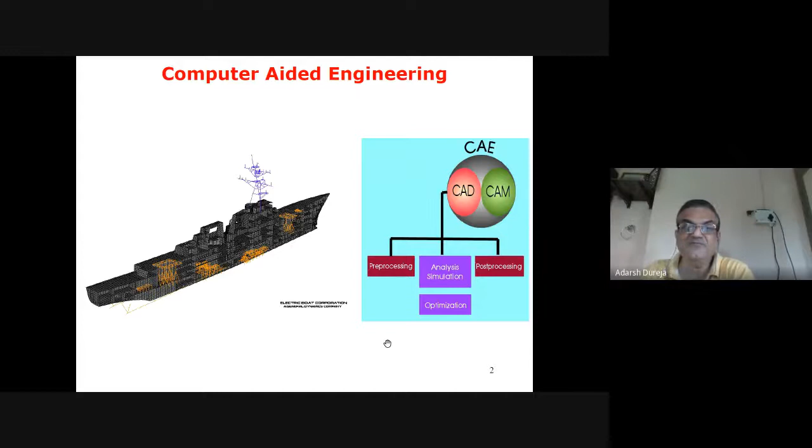So we talk about what is the scope of the analysis, what is the purpose, and at what scale we want to do it. Sometimes we may be interested in a small scale single part optimization, modeling the intricate details of each and every corner of the component, so that we know the detailed stress analysis of that particular component. Once we do this component analysis, our components are qualified.

Sometimes we will be looking for a full vehicle analysis, like a large scale simulation, vehicle crash worthiness analysis, in which we may not be interested in knowing what is happening at individual part level, but we may be interested in knowing what is happening to the whole body of the vehicle, aircraft, or ship.

Both of these analyses may employ the same software, but with significantly different models. What I mean is, in one, where we are optimizing the component itself, we might have modeled each and every intricate detail of the component. While doing a large scale simulation, we might have just replaced it by a rigid link, a bar element, or a beam element. So we are not actually interested in the component itself, but in the whole body of the vehicle, what is happening to that.

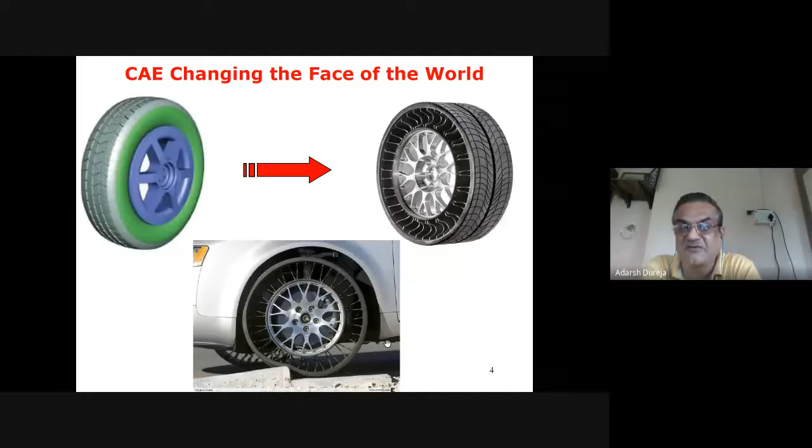So having known this analysis, now we'll move to the representation. How do you represent these structures in the finite element model? So this is my geometry. I'm saying this is the geometry. This I beam is a geometry.

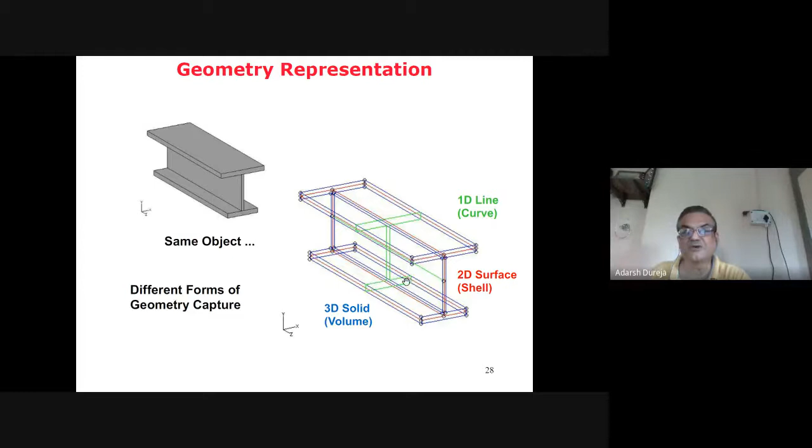And if you look at that, depending on what kind of analysis we are looking for, we can represent this geometry by various finite elements. So what I mean is, if you are looking for what kind of stresses are getting generated in the web, what kind of stresses are generating in the flange, if that is my interest, I should model it as a 3D solid, that is the volume. I should discretize this volume into different 3D elements and do the analysis.

If that is not the case, and the only thing I want to know is what is the warpage of this section and things like that, then I can model it as a 2D surface. So I can discretize this using shell elements.

Suppose that also I'm not interested in, and I just want to use this element as one of the structural elements connecting to different kinds of structures, as a load transfer element, then I can use it as a 1D line. So I can model it as a beam element or a bar element depending on the boundary condition. So the same geometry can be modeled as a 1D element, a 2D element, or a 3D element.

So what I've gathered from the coordinator is that 1D and 2D have already been covered in the previous lecture, so today I will concentrate more on 3D elements.

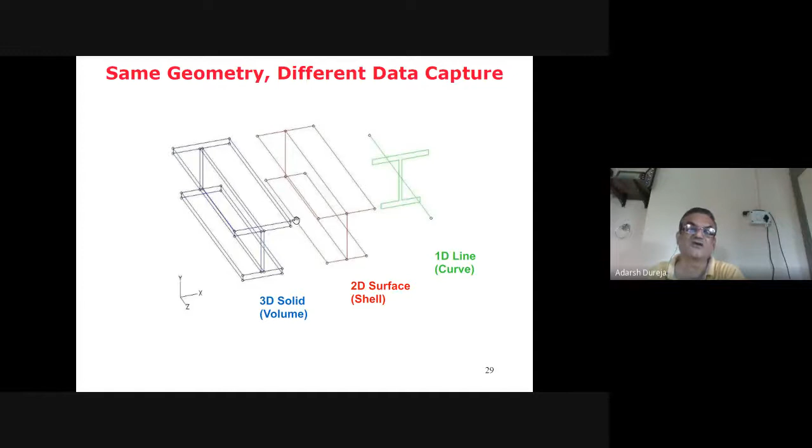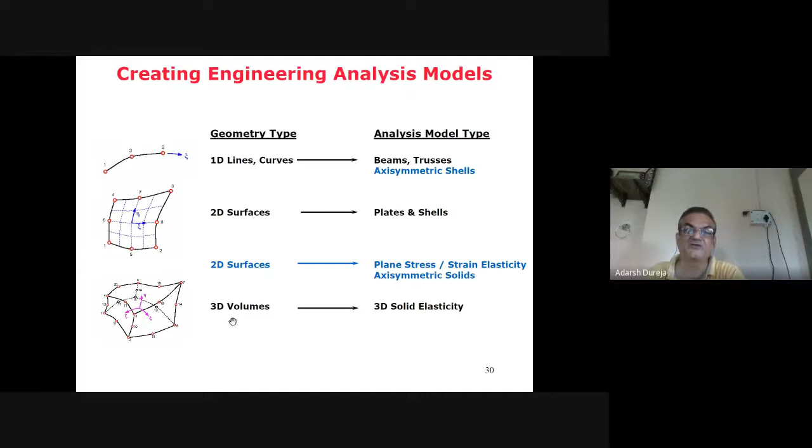So I've just listed what kind of geometry we can have and what kind of finite element models we have. If you are talking about a geometry as a 1D line or curve, we can have a beam element, a truss element known as a bar element, or an axisymmetric thin shell. If you talk about a 2D surface, discretizing geometry by 2D surfaces, we can have a plate element or a shell element. In theory, plate and shell basically refer to transverse loading. For a 2D surface like membrane loading, we can have plane stress, plane strain, or an axisymmetric solid, or a 3D volume with 3D solid elements. So we'll talk about 3D solid elements.

So there could be different components which we may be interested in understanding the behavior of. These are some examples of mechanical components whose behavior we'll want to understand under various operating loads. Basically there are two kinds of elements used for discretizing any solid model in finite element analysis.

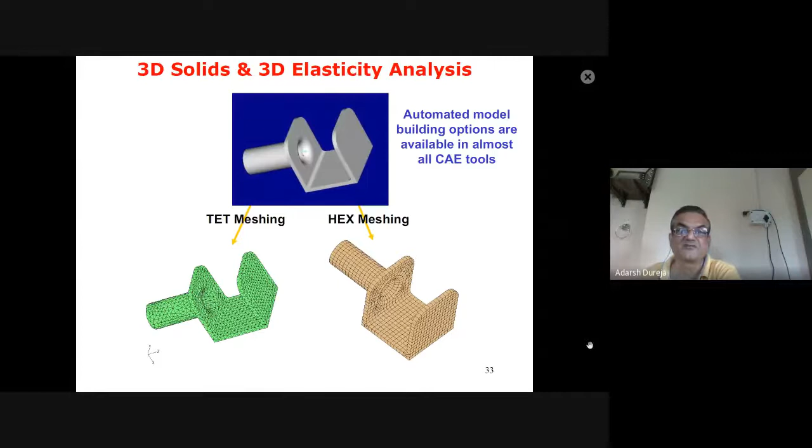To talk about some strain fundamentals, as we know in case of 3D we have 6 strain components: normal strains epsilon x, epsilon y, epsilon z, and gamma xy, gamma yz, gamma zx - these are the 3 shear strain components. This is the stress-strain relationship for 3D, so we have 6 stress components related to 6 strain components through this D matrix.

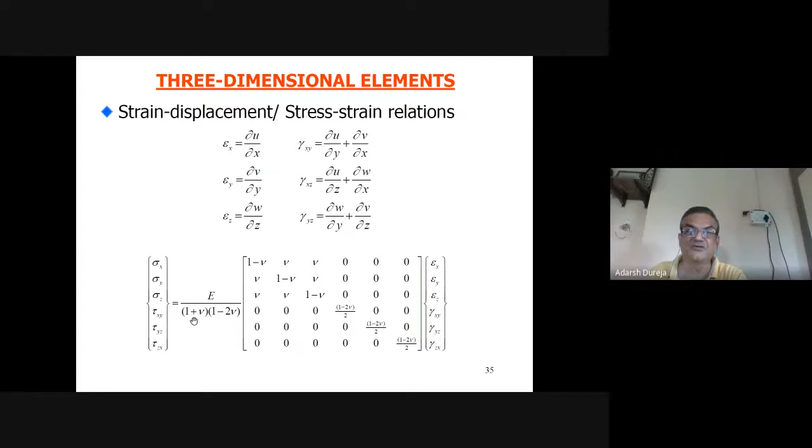So the unknown nodal degree of freedom vector is 12 cross 1. You have U, V, and W displacement at node number 1, similarly for node number 2, node number 3, node number 4. So we have a 12 cross 1 nodal displacement degree of freedom vector.

As we know, to define this polynomial in a finite element technique, we have to a priori choose what kind of polynomial will be suitable for representing the deformation behavior. So we write U, V, and W as functions of X, Y, and Z. This includes the constant parameter required for rigid body motion, and a linear function of X, linear function of Y, and linear function of Z.

Now we have 4 unknowns for U, 4 for V, and 4 for W, so total 12 unknowns. We know these values also at the nodal values, so we can find out what kind of relation develops with the shape function, so that we can represent these unknown values as compared to the unknown quantities like A1, A2, A3, A4. These quantities represent the shape functions like N1, N2, N3, N4. So we are getting shape functions for this.

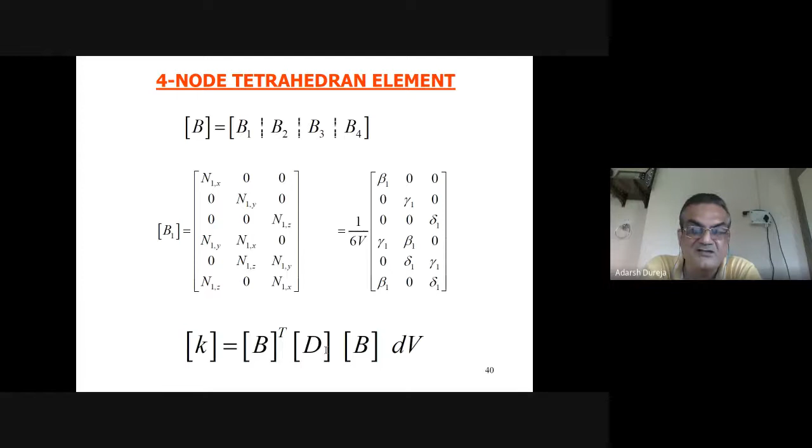Now we know that for writing down the stiffness matrix, we need to know the B matrix and D matrix. We have already defined for 3D elasticity the D matrix, which is the matrix that relates stresses to strains, given as a 6x6 matrix. Now we have to define the B matrix.

As we know, the B matrix comes from the definition of the strain vector. Epsilon x has been written as dou u by dou x, and u can be written as n1 u1 plus n2 u2 plus n3 u3 plus n4 u4. So if I take the first partial derivative of this shape function with respect to x, y, and z, then we'll get the B matrix.

So I partitioned this B matrix into B1, B2, B3, B4, corresponding to node number 1, 2, 3, and 4. If I write down the B1 matrix, that is the first order derivative of the shape function with respect to x, written as dou n1 by dou x, dou n1 by dou y, dou n1 by dou z. This gets populated as the matrix which relates the strain vector to the nodal displacement vector.

So basically, if you multiply with the nodal displacement vector, that is u, v, and w, what we get is dou n1 u1 by dou x. So if you sum it up, you get the strain vector, like epsilon x.

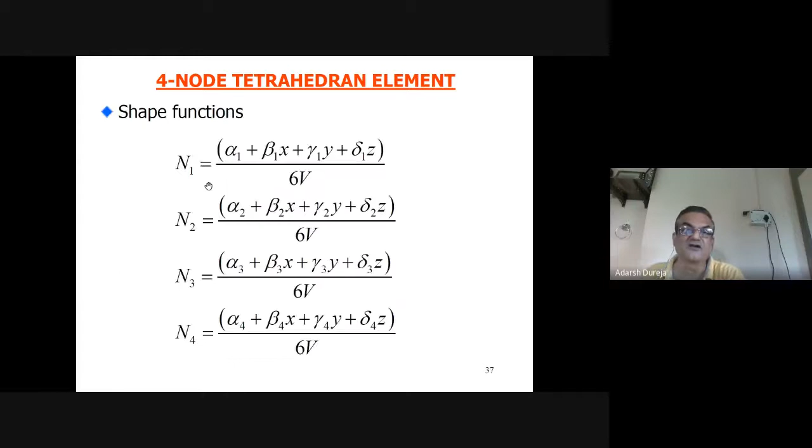So if you now take partial derivatives of n1, recall n1 is alpha 1 plus beta 1 x. If I take the partial derivative of n1 with respect to x, I get beta 1. Similarly, you get gamma 1, delta 1, and for the shear strain components you get combinations like gamma 1, beta 1, and so on. This line represents epsilon x, this represents epsilon y, this represents epsilon z, and these lines represent gamma xy, gamma yz, and gamma zx.

So this is the B matrix, and similarly we can write the matrix for node number 2, 3, and 4. We'll get a constant matrix because these beta 1, gamma 1, delta 1 terms are nothing but functions of the nodal coordinates, and nodal coordinates are constant values. So we get a constant value for this matrix, and we know the D matrix is also constant. So if you multiply these, you get a constant stiffness matrix for a tetrahedron element.

So this was all about a linear tetrahedral element. We can discuss more about a 10-noded tetrahedral also, because right now what we studied is a linear tetrahedral with only corner nodes. If you look at the second order variation of this element, we have to introduce a mid-side node.

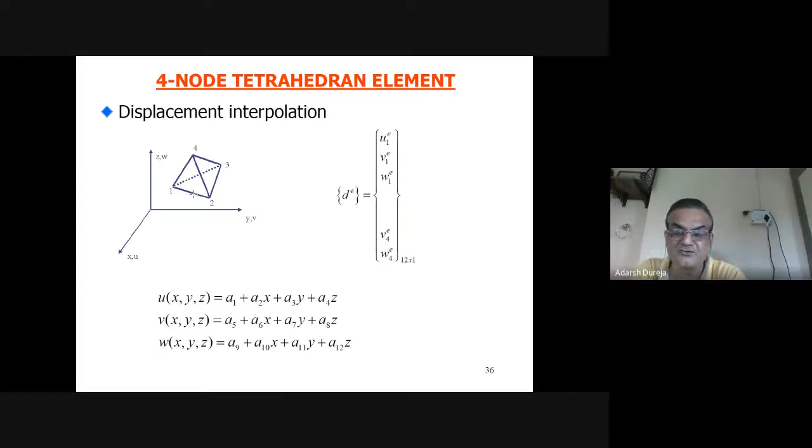We have actually 6 edges, so if we introduce 6 more node points at the mid of these edges, we'll have 6 nodes added to this element. So we'll have a 10-node configuration, which is known as the quadratic tetrahedron element. That is another version of this.

Let us look at another version as far as geometry is concerned. As said, we can have a tetrahedron element or a brick element. This is the most popular element, known as the 8-noded hexahedral element or brick element. So what we have is a cuboid kind of structure with 8 corner nodes like 1, 2, 3, 4, 5, 6, 7, 8. These are the corner nodes.

And we know that we can always write x equal to ni xi, that is n1 x1 plus n2 x2 plus n3 x3 and so on, with summation going from i equal to 1 to 8. And if you write down the shape functions, as we know, they can be written by the method of zeros, using the axes we call xi, eta, and zeta.

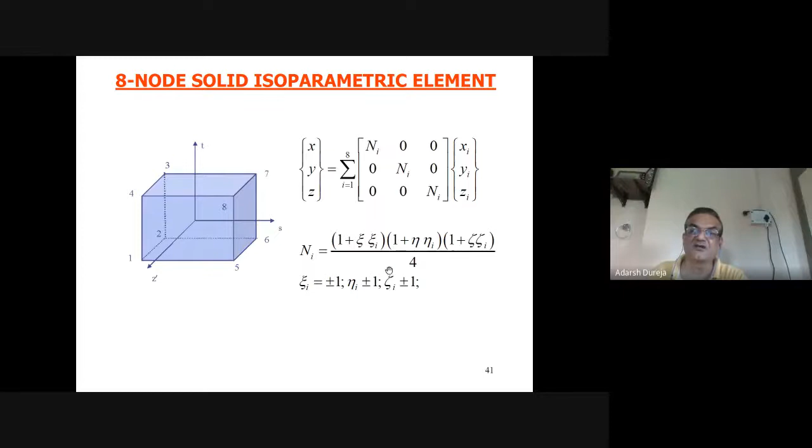So if you write down the equations of those planes where a particular node is not present, you can write the shape function as a general equation. If you substitute the nodal coordinates for a particular node, you get the shape function for that node. To elaborate, suppose you want the shape function for node number 1: write the equations of the top plane, right plane, and back plane, and then match a constant so that you get a value of 1 at its nodal location, node number 1. We adopt the same philosophy for all nodes to write out the shape functions.

Similarly, for a quadratic form of this 8-noded element, since there are now 12 edges, we need to introduce 12 more nodes to this element, giving us a 20-noded element. For writing down the shape functions,

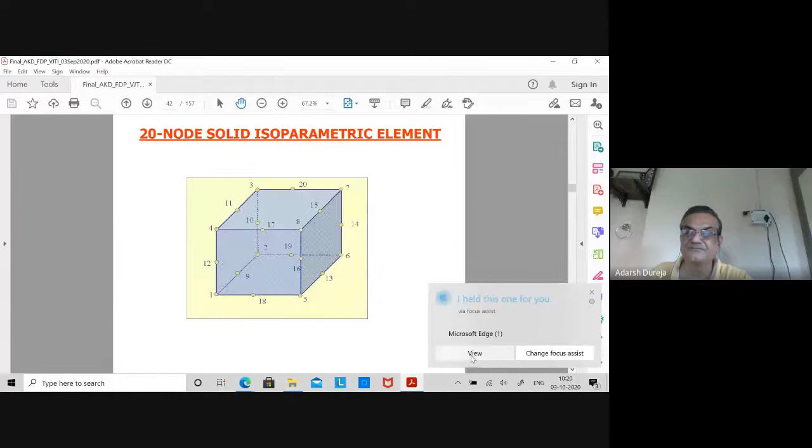the philosophy we follow is the serendipity form of element, where we first write down the shape functions for all mid-side nodes. This is the mid-side node, and we get a quadratic form of this element. So what we have done is introduce a mid-side node.

So for writing down the shape functions, we use serendipity formulation. We write the shape functions for a particular mid-side node first, and once that's done, for the corner node we write the shape function as for a linear element. If you derive a shape function for a linear element and plot it, you get a value of 1 at its nodal location and 0 at other nodal locations. If you plot that 0 to 1, you'll get a value of half at all mid-side nodes.

So what you do is write the shape function for node number 4 as a linear element, then reduce by half the shape functions for node number 11, node number 17, and node number 12. By doing this, you are imposing the condition that the value of the shape function is 1 at its own nodal location and 0 at all other nodes. This is the philosophy adopted for writing shape functions for a quadratic element.

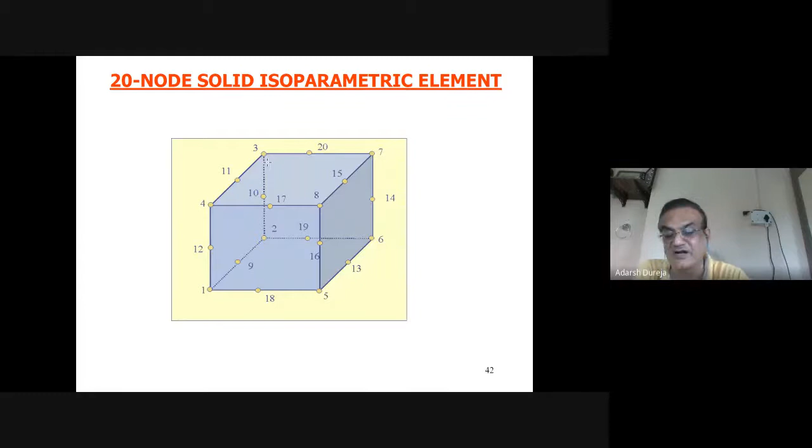Just to give an example, think of an eggshell - it's very fragile, right? But if you load it properly, it can take a large load. Even if these shells are very small, if the loading is truly axial in nature, it can take a very large load, because the load you apply tries to change the curvature of the membrane in the circumferential direction, and that strain is very small, so it can take a very large load.

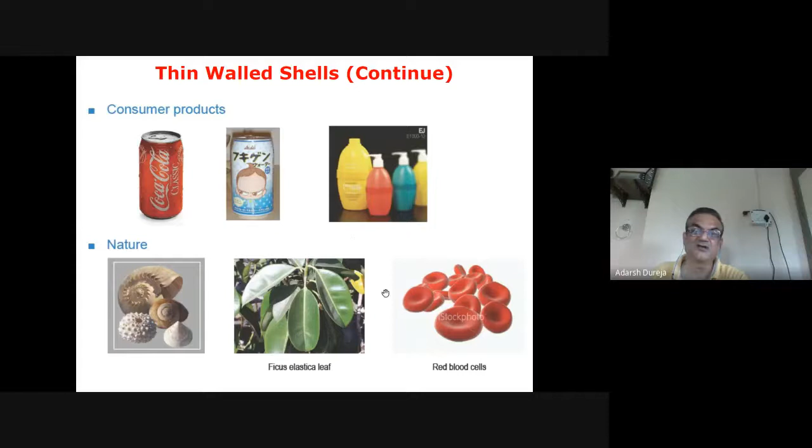So these are the various thin shell structures shown here, and these are some of the structures you see in nature as well. So basically, when we talk about plate and shell elements for analysis, our target structures are thin-walled structures. These are various thin-walled structures which I am showing here.

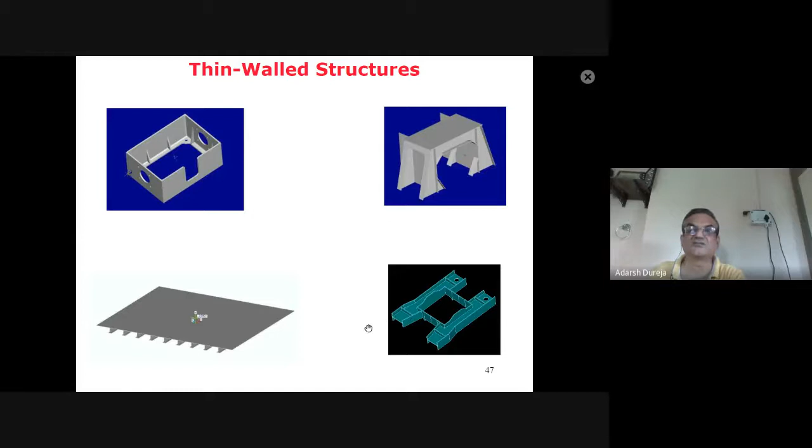So what we do is basically we make a solid model, and out of that solid model we extract the mid surface, because these are 2D elements which are subjected to transverse loading. In 2D elements like plane stress or plane strain, the loading is in-plane, that is, we get a membrane load. But in plate and shell, we apply the load in the transverse direction, as in thin-walled structures.

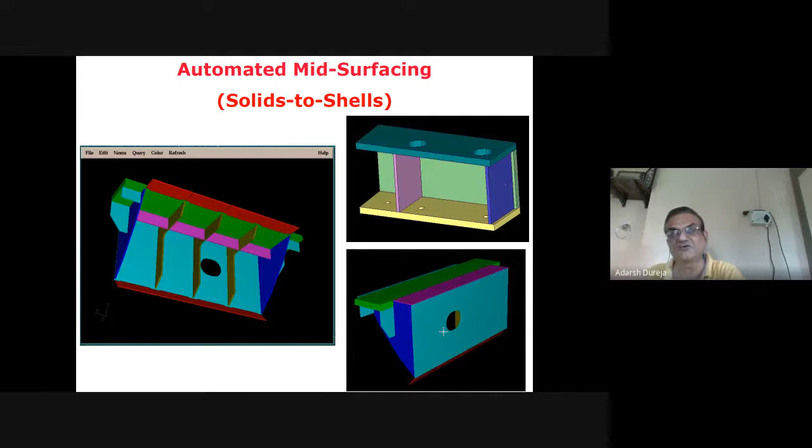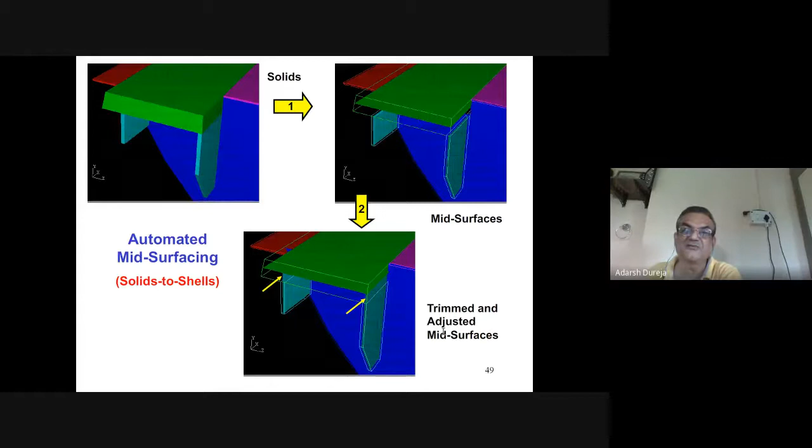So what we can do is model it and then extract the mid surface, and that mid surface can be discretized using finite element. These are various examples which I am showing here. This is the actual structure, maybe chassis of the vehicle, and you can extract the mid surface, which can be modeled using a 2D plate shell element.

These elements have thickness as a property of the element, not actually modeling the thickness of the plate. This is another example of a stiffened plate, where you have a plate and at the bottom beams to strengthen it. We have two options, shown as idealization 1 and idealization 2.

The stiffener has been modeled explicitly as a shell element. These are the top elements representing the plate, and this is the bottom representing the stiffener. If you are not particularly interested in understanding what is happening to the stiffener, you can instead model this stiffener as a beam element.

So there will be one more set of elements running throughout this length, and those will be beam elements. The beam elements will have properties like stiffness, moment of inertia, and so on. Both idealizations will work nicely.

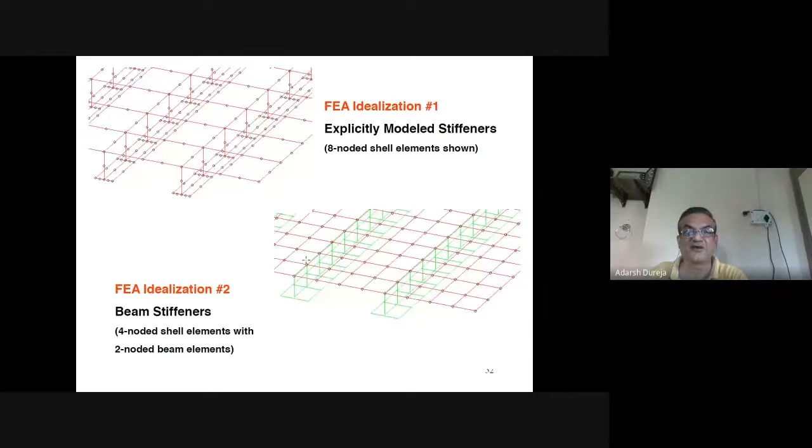Only thing, as an engineer, we have to decide whether we want to analyze this stiffener separately, or we just want to understand the effect of this stiffener on the whole deformation pattern of the plate. That is the decision we have to take, and accordingly we can model it.

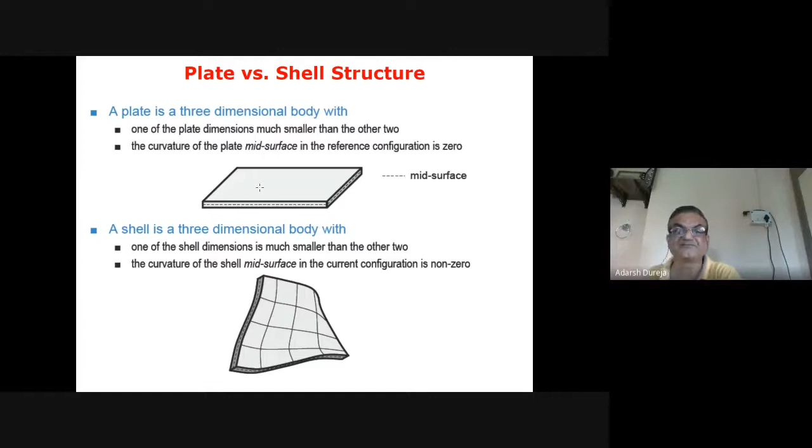Now, if you talk about plate and shell structures, the mid surface of a plate is flat, while the mid surface of a curved shell is not flat, and one dimension is very small compared to the other. So we are able to utilize the plate and shell finite element technique for analyzing this structure; otherwise, we would have to go for 3D analysis. Basically, thinness and flatness are the major properties of a plate structure.

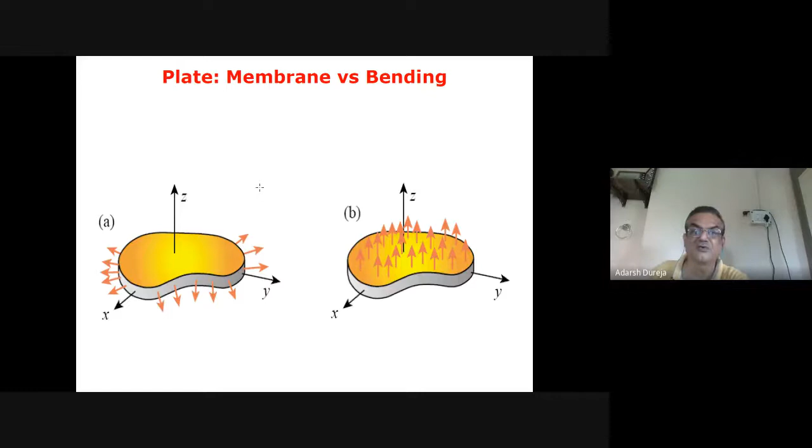Now we can have membrane loading as well as bending loading, so both kinds of loading can be there. This is the membrane and bending response of a plate element.

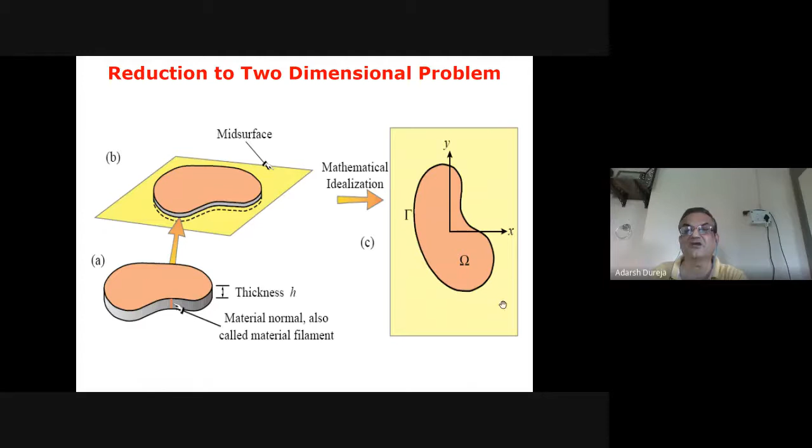Now this is what I was telling -- this is the actual structure, and this is the thickness of the structure. What we do is take the middle surface, and that middle surface becomes our mathematical idealization. So this is the boundary, and this is the domain which we will discretize using finite element.

Now the question comes, what would be considered a thin plate? There are two theories related to this kind of structure: one is thin plate theory, another is thick plate theory. The question arises when to use thin plate theory versus thick plate theory. Based on the literature, there are two parameters defined: R1 parameter and R2 parameter.

R1 parameter is defined as the minimum span dimension of the plate, since the plate has length and width -- whatever is the minimum span dimension, divided by the thickness of the plate, gives us the R1 parameter. Similarly, maximum deflection of the plate divided by the thickness of the plate gives us the R2 parameter. Based on these two parameters, we can define what case we are looking for. There are three cases which are happening here.

If the R1 parameter is more than 10, we can say the plate is thin, that is, the thickness of the plate is very less than the other dimensions of the plate. And if the R2 parameter is less than 0.2, meaning the deflection of the plate is less than 20% of the thickness, then we call it a small deflection problem.

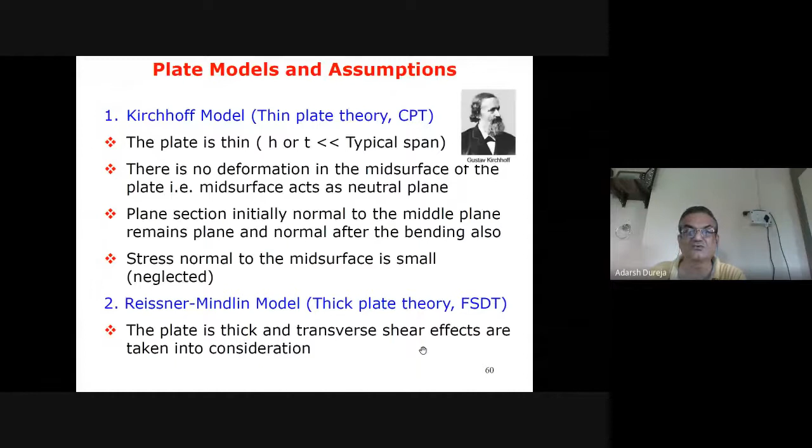And the stress normal to the mid surface is small. That is, if x and y is the plane of the plate and z is the thickness of the plate, then sigma zz is very small - that is what we mean by this assumption. Similarly, for Mindlin-Reissner hypothesis, used for thick plate theory - also called first order shear deformation theory - the plate is thick and the transverse shear effects are taken into consideration. So these are the two kinds of theories which we'll discuss here.

As far as stresses are concerned, sigma zz is small, and the transverse shear stresses tau xz and tau yz are very small compared to the other stresses. Suppose this is the plate, with some pressure loading, and we have a simply supported case all along the boundary. So the transverse normal stress is sigma z, and the transverse shear stresses are tau xz and tau yz.

Suppose the dimension of the plate is L cross L, and we are applying a uniform pressure of P. If you look at the load equilibrium, the load P applied multiplied by the area of the plate, L into L, equals the transverse shear stresses, tau xz and tau yz. This plate is supported all along its circumference, along its edges.

So basically the stresses would be either tau xz or tau yz. Supposing it is supported at all four edges, two edges will be supporting tau xz, two edges will be supporting tau yz. So the area which is supporting the load is 2 into L into T. So the magnitude of tau xz and tau yz comes out to be PL by 2T. So the order of the stresses is P times L by T.

If it's a thin plate, then L by T is minimum 10 - we said more than 10 we call it thin plate. So the transverse shear stresses would have the order of magnitude of 10 times the load P. That is, sigma zz is P, and transverse shear stress is of the order of 10 into P or more. Similarly, for the bending stresses, sigma x and sigma y.

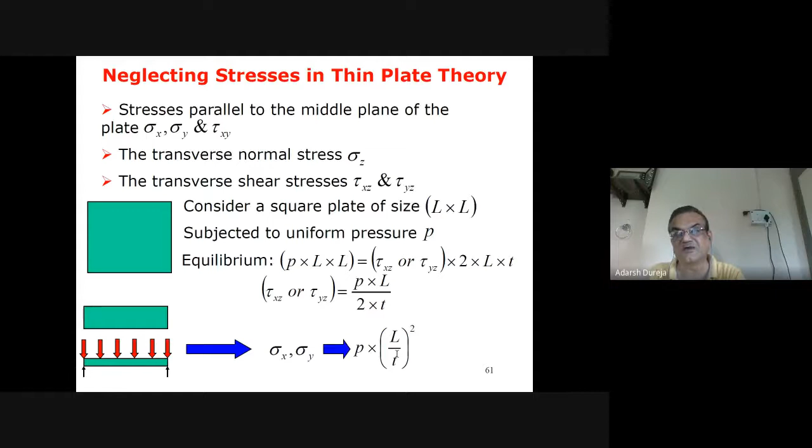So sigma zz, transverse shear stresses are of the order of minimum 10 P, and the bending stresses are of the order of 100 P. So we can neglect P with respect to 10 P and 100 P.

Now coming back to the kinematic assumption, which says that the normal remains normal. If the normal remains normal, we can always write that. We are discretizing this mid surface, but we want to know what kind of U deformation or V deformation occurs at different points. So in the kinematic assumption, we assume that the rotation equals the slope. So theta equals dou W by dou X.

If I multiply this Z dimension at a particular layer, all these layers have some Z value, because this is Z equal to 0. Going upward, Z equal to plus; going to the bottom side, Z equal to minus. Suppose I am interested in understanding what kind of U deformation a particular layer is getting subjected to. I know the Z ordinate of this point, and I can multiply it with the rotation, which is nothing but the slope, since W is my independent parameter. This way I can always find the U deformation at that particular point. So although I have discretized using only 2D elements, I am able to get the full picture of the plate deformation. That is what we mean by the kinematic assumptions of U and V.

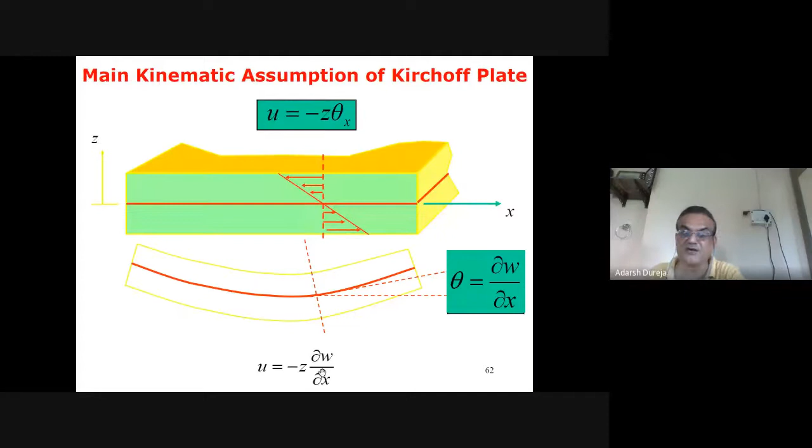Now, if you look at the strain displacement relation, we know there are 6 strain components for 3D structures. With these assumptions, we can write the value of epsilon x, epsilon y, epsilon z. By the fundamental definition, epsilon x equals dou u by dou x, and we substitute the value of u. From the kinematic assumption, u is written as minus z times dou w by dou x. Substituting this gives us the strain components, including the strain component in the y direction. Since we are modeling only the mid surface, W is not a function of Z, so we write W as a function of X and Y only, giving us dou W by dou Z as 0.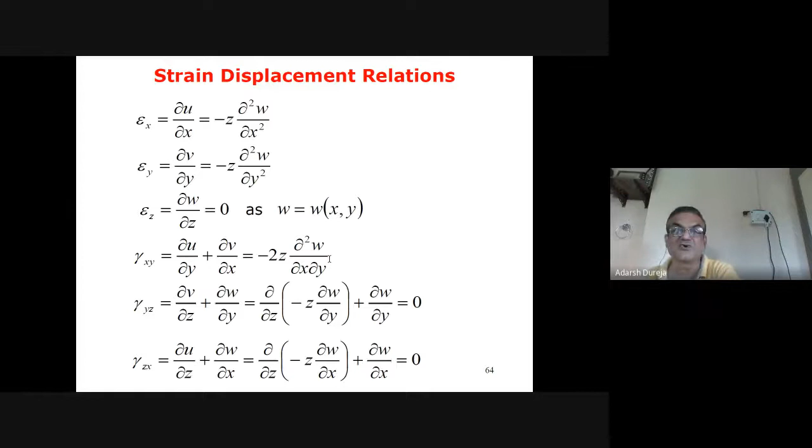Similarly, for the in-plane strain components like gamma XY, written as dou U by dou Y plus dou V by dou X, substituting the values of U and V from our deformation pattern gives us the in-plane shear strain component. Substituting suitable quantities for gamma YZ and gamma ZX gives 0. So basically we have only 3 strain components: epsilon x, epsilon y, and gamma xy. This is my strain vector, made up of these 3 strain components.

Now I'm looking for the strain curvature relationship. We know the double derivative of deformation can always be written as the curvature, so kappa x equals dou square W by dou x square. We write epsilon x equal to minus z times dou square W by dou x square, which we replace by kappa x and kappa xy. These are the curvatures of deformation, and kappa xy is known as the twist of the middle plane.

Now, if you look at the stress strain relationship, for the 3D case we write epsilon x equal to 1 by E times sigma x minus nu times sigma y plus sigma z, with similar relations for others. Substituting the values of sigma x and epsilon x, epsilon y, epsilon z, and inverting this relation, we get a relation between stress and strain for this case. So we have three stress components, sigma x, sigma y, tau xy, in terms of the three strain components, epsilon x, epsilon y, and gamma xy.

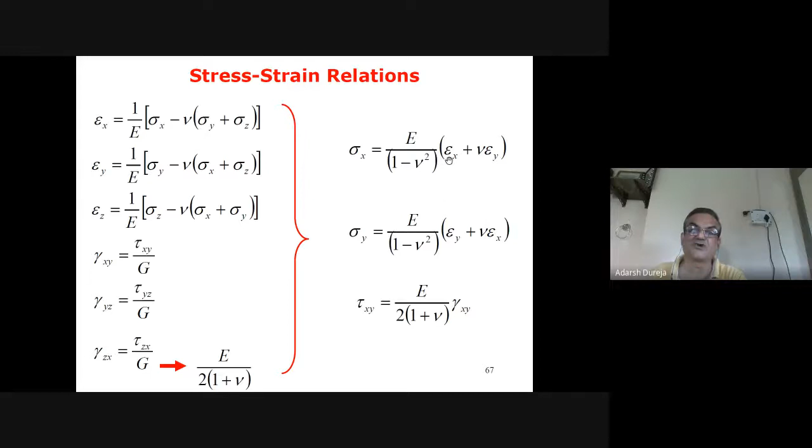Now let us worry about what is the kind of variation of these stresses in the domain of the plate. So if you look at that, sigma x and sigma y, these are the bending stress components.

This is sigma x and sigma y, which is linearly varying across the thickness of the plate. So if you are applying a force from the bottom of the plate, you are having compression at the bottom and tension at the top, which was expected, right?

And this is the in-plane shear stress, that is tau of xy, complementary shear stress. And you have a transverse shear stress, tau of xz and tau of yz, which is parabolic in nature. So these are the stress variations along the thickness of the plate.

As you are applying a pressure Q from the bottom of the plate, and there is no pressure applied on the top, there will be a variation of sigma zz, although it is not shown here. It will be some kind of cubic polynomial variation of sigma zz from the bottom to top. But as we have already said, this is very negligible compared to the other stress components, so we have neglected it here.

Because of this variation of stresses, we'll have moments and shear forces getting generated. Because of sigma x we have m of x, tau of xy generates m of xy, and the transverse shear stresses like tau of zx and tau of yz cause shear forces q of x and q of y. So this is basically the force equilibrium diagram of a plate element.

Moments are generated because there is a variation of stress sigma x from the bottom to the top of the plate. So if I take a small ligament here and see the variation of sigma x, I need to integrate this sigma x from the bottom fiber of the plate to the top fiber, that is minus t by 2 to plus t by 2, where t is the thickness of the plate. Then the variation of sigma x multiplied by z, at what distance this stress is acting, integrated over the whole thickness of the plate, gives us the value of m of x.

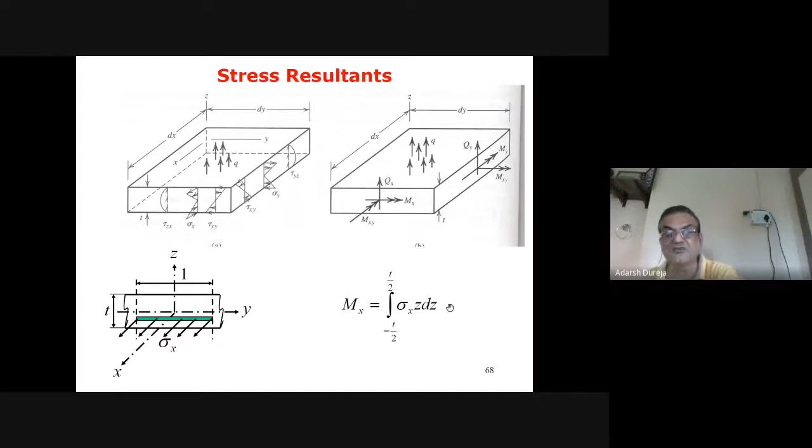So these are the various equations for the bending moments, and these are the various relations for the shear forces.

Now we will worry about what is the relation between moment and curvature. So I know moment can be written as minus t by 2 to t by 2 of the variation of sigma x multiplied by z dz. I can substitute the value of sigma x in terms of the strain quantities, and strain quantities can be written in terms of the curvature, and I can integrate it out to find the kind of relation which exists between moment and curvature.

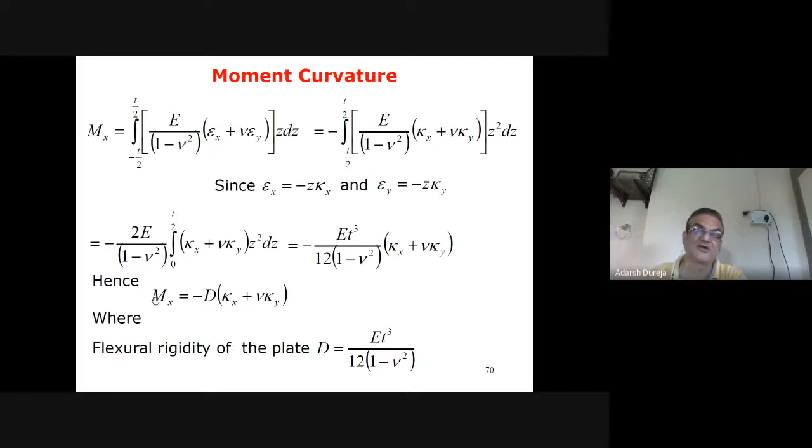So what I'm getting is m of x equal to minus E t cube by 12, 1 minus nu square, times kappa x plus nu kappa y. These are the curvature terms, and there is a constant for a particular plate, because t is the thickness of the plate, E is the Young's modulus, and nu is the Poisson's ratio. This gives us what we call, in standard terminology, the flexural rigidity of the plate, D. So I'm getting a relation m of x equal to minus D times kappa x plus nu kappa y.

So this is the moment curvature relationship. Similarly, we can find out the moment for y and the twisting moment m of xy. So this is the kind of relation which relates moment to the curvature.

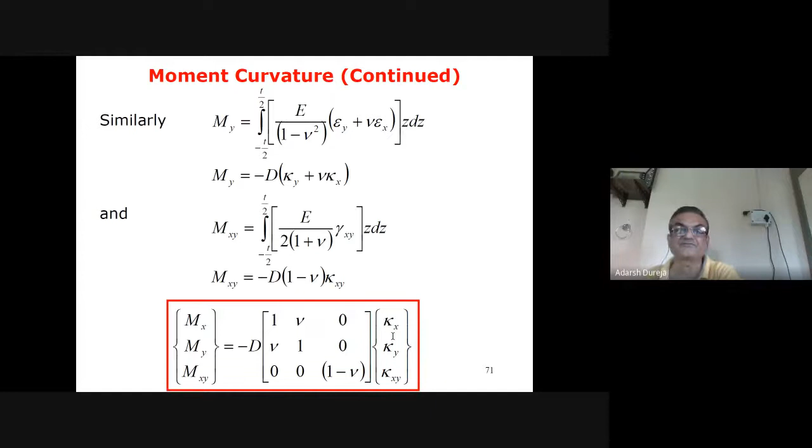Now, if you substitute q of x and q of y from these equations into this first equation, we'll get a relation which converts all these equations into a single term, which is delta square. We have substituted the value of q of x and q of y in terms of mx, my. So this is the relation.

Now, if I substitute the value of mx, my and mxy in terms of the displacement component, that is w, I get this partial derivative equation, which can be converted into a fourth order partial derivative equation, which looks like this.

So ultimately, we are having a partial derivative equation in terms of an unknown quantity, which is only W. So as far as the field quantity is concerned, if I discretize W only, or if I have to call a finite element equation, I have to discretize only W. If I find out the value of W, any other thing like stresses, strains, or other components of deformation like U and V, we can calculate. So this is the only independent quantity which we need to discretize.

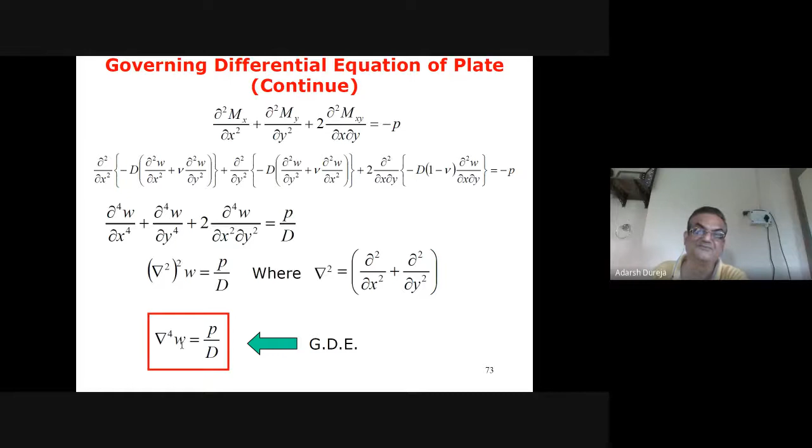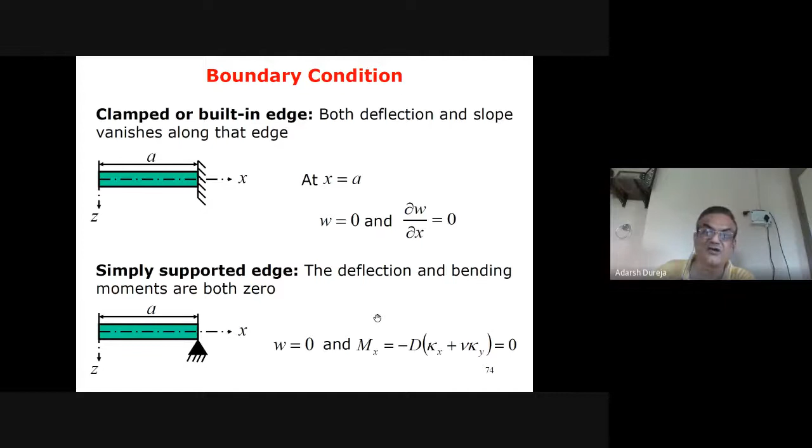That is W. As far as boundary conditions are concerned, there could be two kinds, like the plate is fixed at one end. So what kind of deformation will it have? There will be no deformation, W equal to 0, and there cannot be any slope. And if it is simply supported, then again there is no deformation, and the moment can be 0. So these are various kinds of boundary conditions which we may have to solve for.

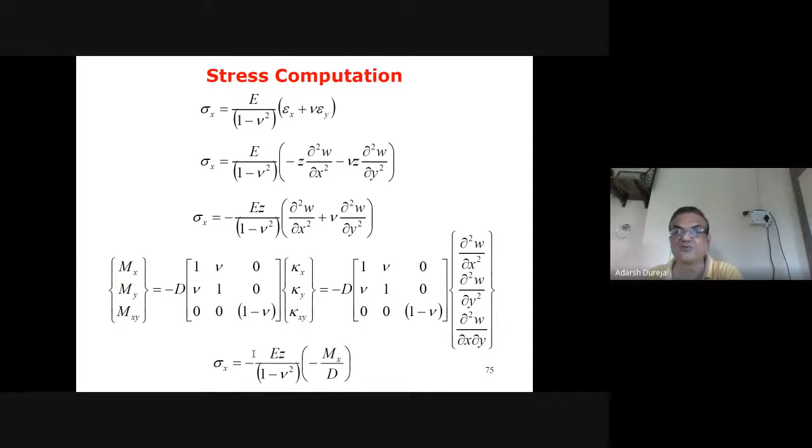Now, based on the equations, having calculated the moment, we can always calculate what will be the value of the stresses. This is all part of the post-processing. So once you calculate moment, we can always find the kind of stresses. These are some stress computations I have shown; I'm not going into detail of that.

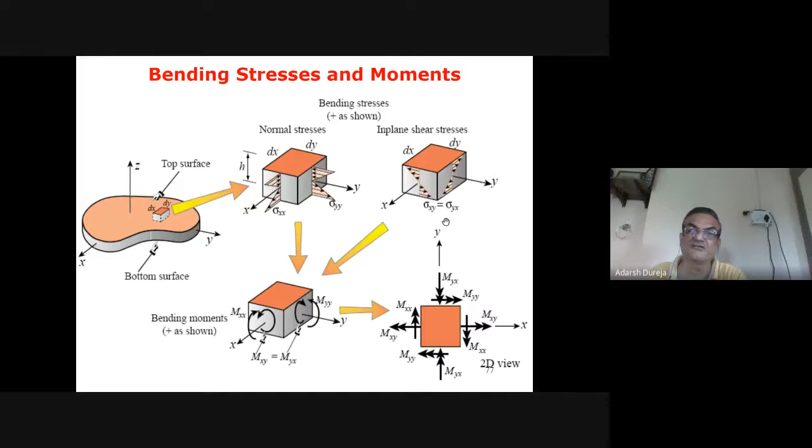As far as bending stresses, I have already shown pictorially here: tension at one plane, compression at another half. Similarly, in-plane shear stress, and for the transverse shear stresses and transverse shear forces.

Now we know that in case of finite element technique, what we do is we write down the strain energy, that is nothing but epsilon transpose sigma epsilon dV. To find the strain energy, we have three strain components, three stress components. So this is the strain energy.

Now, if you want to find the potential energy, it is defined as strain energy minus potential of the load. Suppose T is the traction acting on the plate. So T times deformation, that is the traction force acting multiplied by the deformation, integrated over the whole boundary where the force is acting, is the potential of the load. So if you subtract potential of the load from the strain energy, what we get is the potential energy.

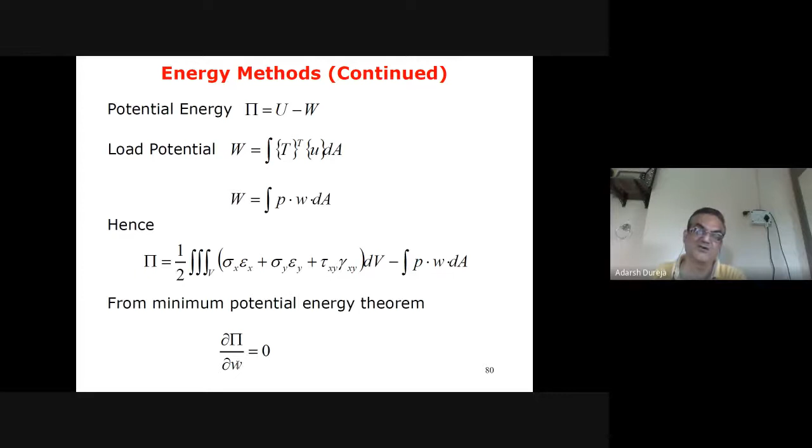And what we try to do is minimize this potential energy with respect to the unknown quantities and find a stationary solution, so that we can find what will be the configuration after supporting the load. So what is the simplest finite element as far as thin plate structures are concerned?

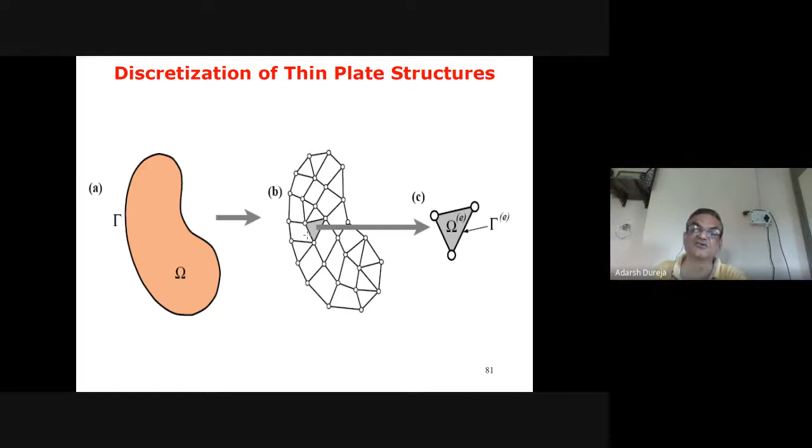So this is our domain of analysis, omega. If I want to discretize using the simplest finite element, we know that in case of 2D surface, triangle is the simplest element. So this is the triangular element.

Now, as far as the degrees of freedom are concerned for this triangular thin plate element, we have one transverse displacement, that is W, and two rotations, theta x and theta y. Basically, W is the only independent variable, but we can always write theta x and theta y in terms of the slope: theta x as dou W by dou y, and theta y as dou W by dou x.

So these are the 3 degrees of freedom for the simplest plate element, a 3-noded plate element. Totally we have 9 degrees of freedom for this plate element, 3 degrees of freedom at each node, and there are 3 nodes for this particular plate element.

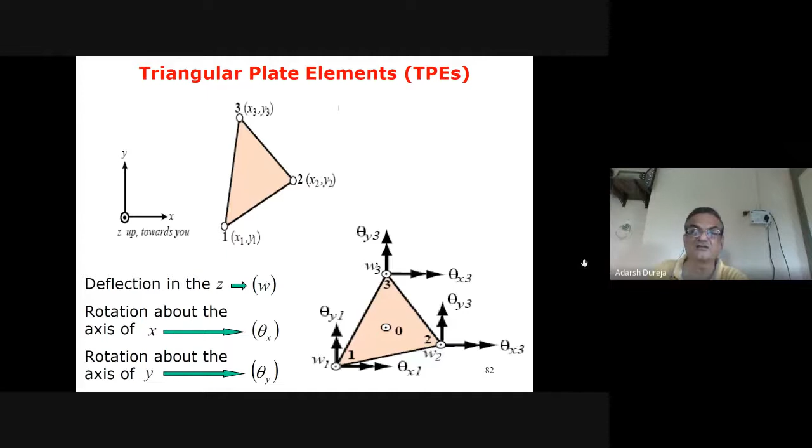So that is what is 3 nodes I, J, and M, and theta x is nothing but dou W by dou y, and theta y is nothing but dou W by dou x.

If you look at the element displacement vector, this displacement vector for this particular element has got 3 components: one coming from node I, another from node J, and another from node M. For node I, there are 3 degrees of freedom, that is Wi, theta xi, and theta yi. Similarly for node J, Wj, theta xj, and theta yj. And for node M, Wm, theta xm, theta ym. So these are the 3 degrees of freedom at each node, and our elemental displacement vector is 9 cross 1.

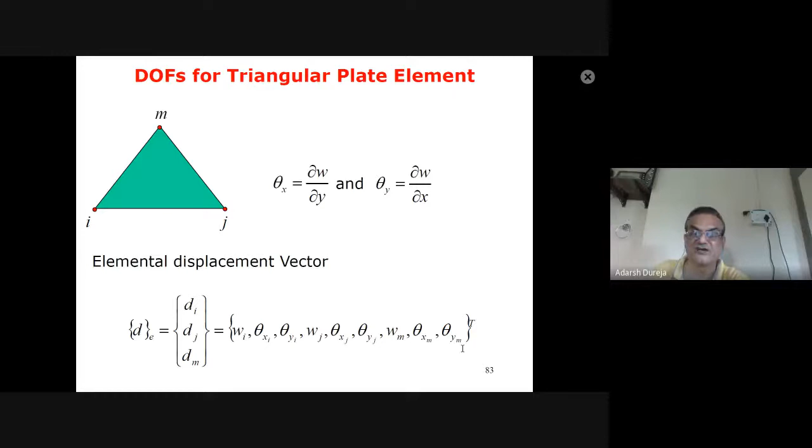Now, moment can be written as, we know there are 3 moments: mx, my, mxy. We integrate sigma x, sigma y with the variation of z, and we get this matrix which relates the moment vector to the strain vector, which is nothing but the curvature vector. So this is the matrix which relates moment to curvature, which is the D matrix.

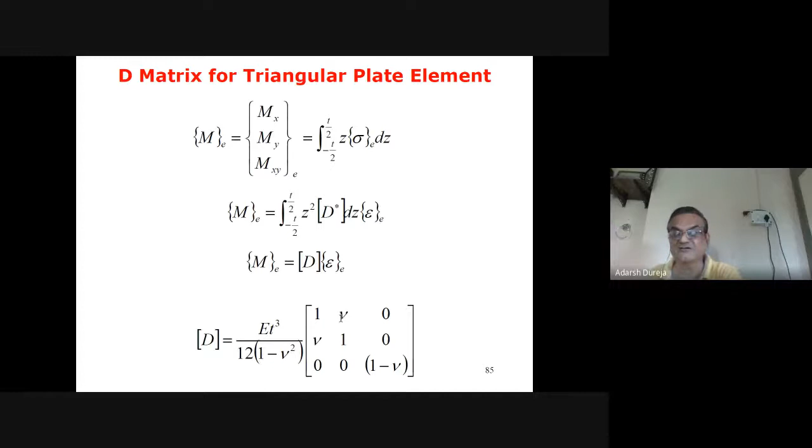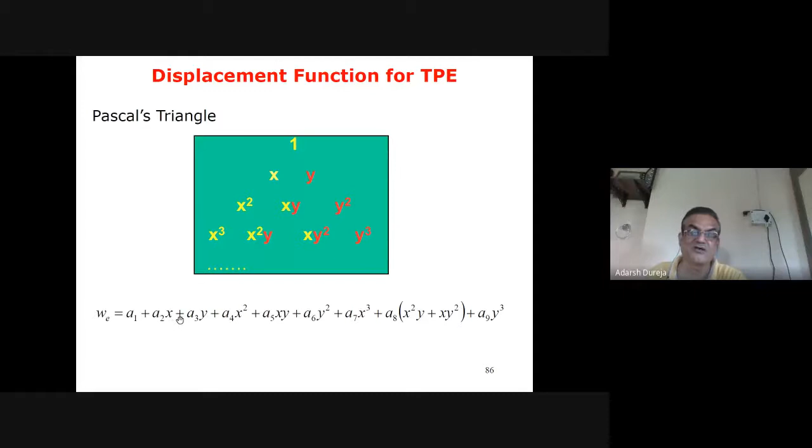What we have defined here is a1, a2, a3, and so on. So if I substitute the coordinate of a particular node, suppose I am looking for node I, which has coordinates xi and yi. By discretizing this domain into various elements, I always know the nodal coordinates: xi, yi, xj, yj, xm, ym, and so on. So if I substitute that into the polynomial, I am able to populate this matrix.

So that is why we call it this matrix as C matrix. Basically, this matrix is made of coordinates, nodal coordinates. So it's a C matrix. By having this relation, we can always relate nodal values to the unknowns, right?

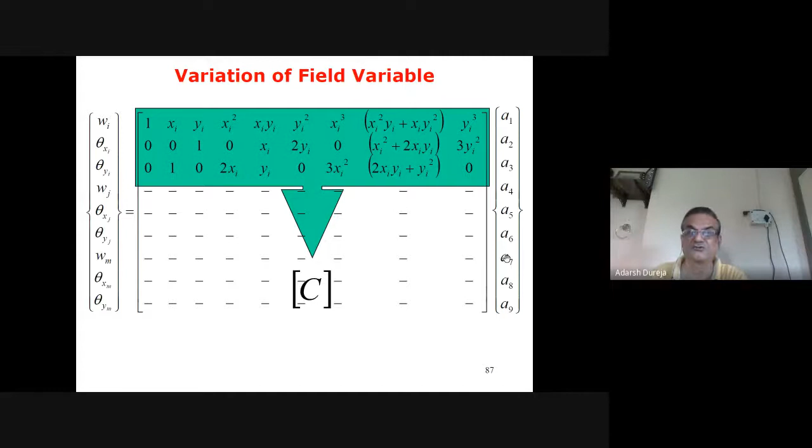But what we are seeing here is we don't know the unknowns, right? A1, A2, A3 are not known to us. So what we will do is we will inverse this matrix. So what we have here right now is the nodal displacement vector equal to some kind of a coordinate matrix multiplied by the unknowns, right?

Now I am interested in knowing what is the value of A. So what I am doing is I am inverting this matrix. I am writing A equal to C inverse D. So this C matrix I know because I have already discretized this particular element.

I know xi, yi, and all other coordinates. So if I populate it, I know the nodal values, right? I can always find out what is the A matrix, A vector actually.

Now, if I write down W, that is the polynomial, that is the field variable inside the domain of the plate, it is written as a polynomial, that is 1, x, y. This is the polynomial which we had chosen. So this is the L vector, and another is unknowns like a1, a2, a3, a4. So I am writing W equal to a1 plus a2x and a3y and all that. So basically, this was the polynomial which we had chosen, right?

Now I know the value of this a1, a2, a3 vector, right? So what I can do is I can substitute the value of these unknowns in terms of the nodal quantities. So I can write A equal to C inverse D. So this is the polynomial L. This A value has been replaced as C inverse D.

So C inverse D, so basically what I am writing is W equal to some matrix which is multiplied by the D matrix, right? And D matrix is nothing but the nodal displacement vector. So we know that the matrix which relates nodal displacement vector to the field quantity, that is the unknown in the domain of the plate, is known as the shape function.

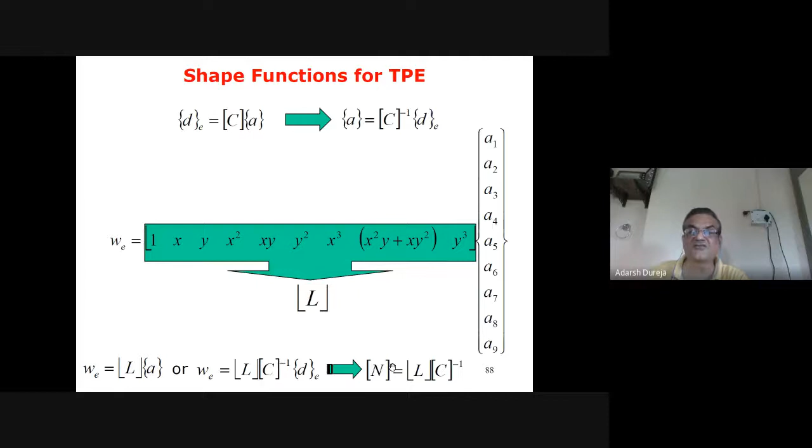So now we have identified what is the D matrix, what is the shape function matrix, what is the B matrix. I can always write down what would be the stiffness matrix. So I'm saying KE equal to B transpose D B. That is our standard definition. I'm substituting the value of B and D matrix.

So I'm getting H C inverse transpose of that D matrix H C inverse. I'm transposing it out and finding out the integration, right? So if you can see that all these matrices are constant values, so you get a constant stiffness matrix or constant stiffness value for a particular plate element, right?

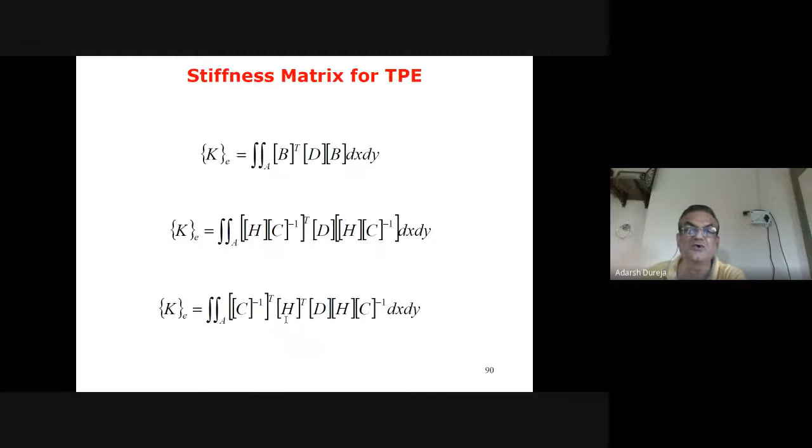So this is all about the left hand side vector of this equilibrium equation. As we know that in finite element technique, ultimately what we solve is K u equal to F.

Okay, KU equal to F means K is the stiffness matrix, U is the unknown displacement vector, and F is nothing but the force vector, right?

Now, as we are seeing in this particular problem, the load is applied in the domain of the plate. If you are applying load on the domain of the plate, I need to have a mechanism, because we know that in finite element we can only apply load at the nodal location, right? So if you are pressurizing this plate structure, there should be some mechanism by which I should be able to transfer these loads to the nodal quantities.

So the mechanism given in finite element is to use a consistent approach. What we mean by consistent approach is we use the same shape function, N transpose, to distribute this pressure loading, which is in the domain of the structure, to calculate the nodal loads. So we are integrating this pressure loading with the help of these shape functions in the domain of the plate.

So what we'll get is the right hand side vector, Q, that is the force vector, has got three terms emanating from node number I, node number J, and node number M. These are our initial node numbers which we had given to a thin plate element. And corresponding to that, we'll have three components, because we know that we have three unknowns like W, theta x, and theta y.

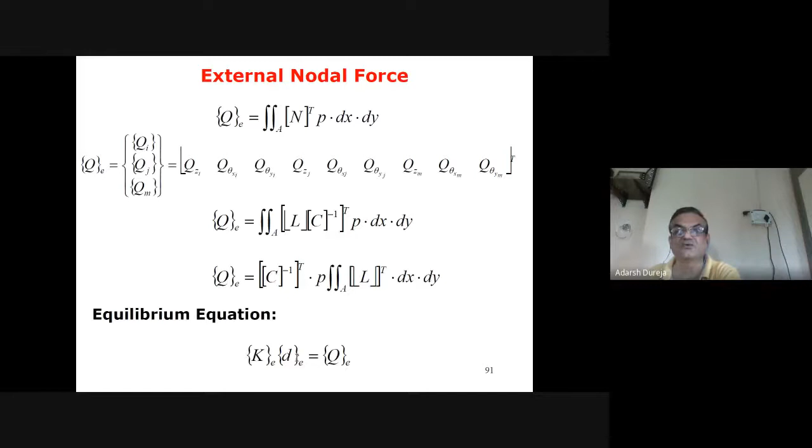Now we want to check whether the element we are devising is a conforming element or a non-conforming element. I'll come to more detail about what is a conforming element or a non-conforming element. Let us first see what element we have devised.

So what we know is WE, that is the nodal displacement vector. We had chosen this as a polynomial for the field variable, with 9 unknowns and all that. Now I have particularly oriented this element so that the mathematics become easy.

So what I have done is I have aligned this particular element so that the edge 1, 2 is along the axis of y, and the length of this edge is L here. Now, if I want to find out what is the variation of W along the axis of y, the equation of this line is x equal to 0. So I just substitute the value of x equal to 0 here. So W at x equal to 0 is this quantity, substituted with only x equal to 0.

Now, if I want to find out what is the rotation of this particular edge, dou w by dou y basically gives you theta x along the axis of y, that is x equal to 0. So what I have done is I have taken a partial derivative of this polynomial with respect to y, substituted the value of x equal to 0, and I get this as the variation of theta x along the axis of 1, 2.

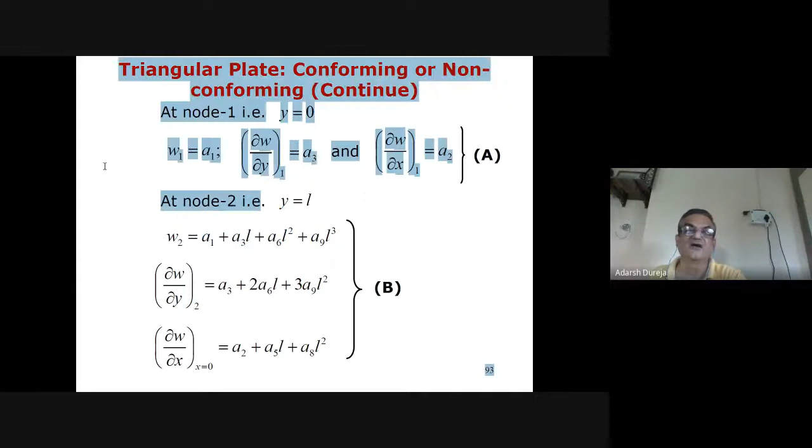But what happens is if I look at these two equations, like the first equation with A1, A3, and these two equations like W2 and theta x2 — that is A1, A3, A6, A9, A3, A6, A9 — if I look closely at these two equations, I have only 4 unknowns: A1, A3, A1, A3, A6, A9, A3, A6, A9. So what I conclude from analyzing these 4 equations is I can uniquely determine the value of W and theta x, but I have problems determining the value of theta y.

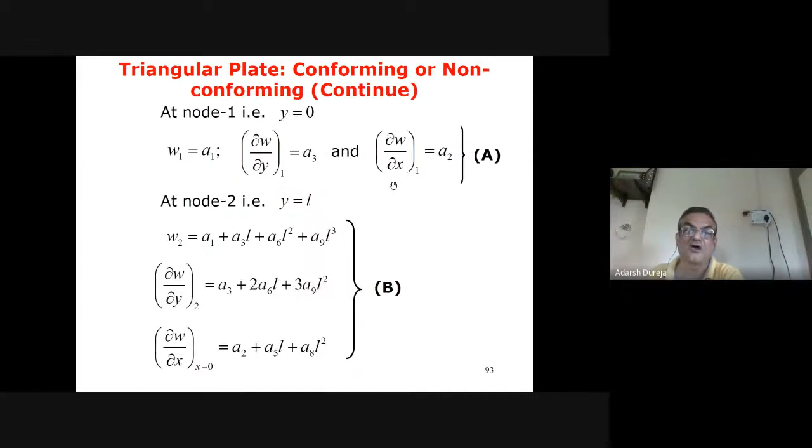So in such a scenario where we cannot uniquely determine an unknown field quantity, we call it a non-conforming element. Also, for this particular edge, the normal slope calculated from this side of the element, and from the element sitting on the other side of the mesh, will have some error if we compare them. But as far as the transverse displacement along this edge from this side or that side is concerned, W continuity is guaranteed, and the slope along this edge is also guaranteed. Only the continuity of the normal slope is not guaranteed. So such elements are known as non-conforming elements, but they are still in use because of their simplicity.

So in conforming and non-conforming elements, continuity of W and dou W by dou y, that is theta x, is guaranteed, while continuity of dou W by dou x is not guaranteed. So these are known as non-conforming elements.

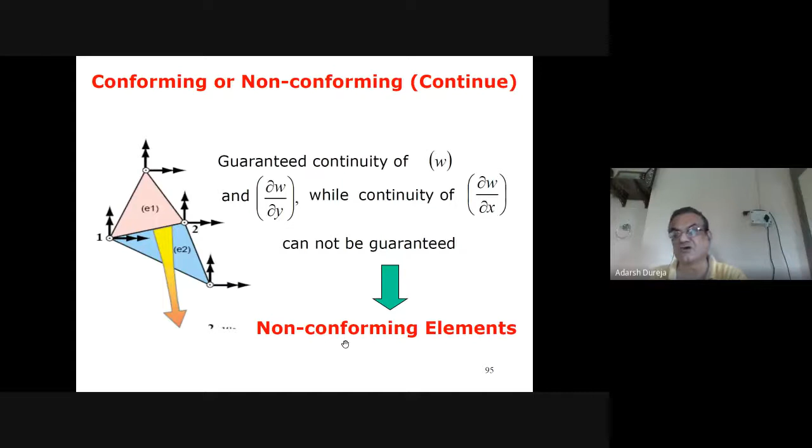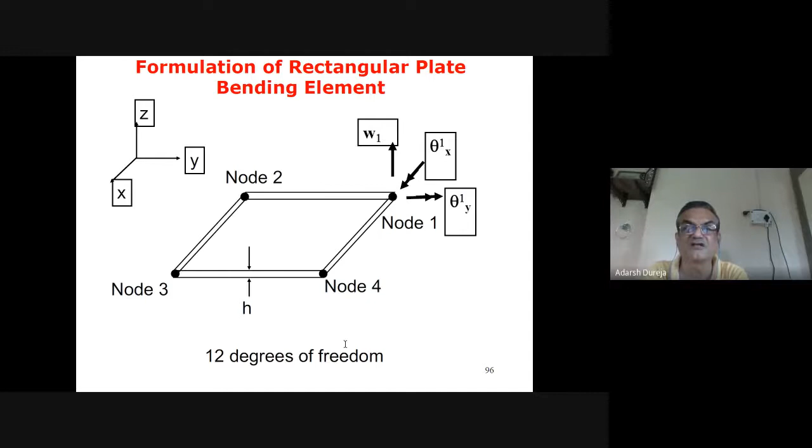Similarly, we can formulate a 4-noded element based on the similar ideology, with W, theta x, theta y. So basically we have 4 nodes and 3 degrees of freedom at each node, giving a nodal displacement vector of 12 cross 1. For choosing from Pascal's triangle, up to this level we had 10 unknown quantities, so we are choosing this and this. You could also choose x4 and y4, which would also not cause any geometric biasing.

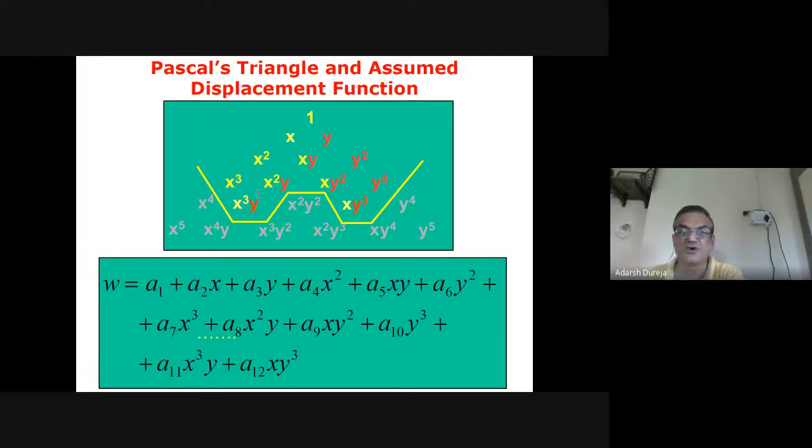So this is one of the polynomials which I have shown here, for a rectangular plate element with 3 degrees of freedom: W, dou W by dou x, and dou W by dou y. A similar methodology can be adopted for deriving the shape functions, as we did for the 3-noded triangular plate element.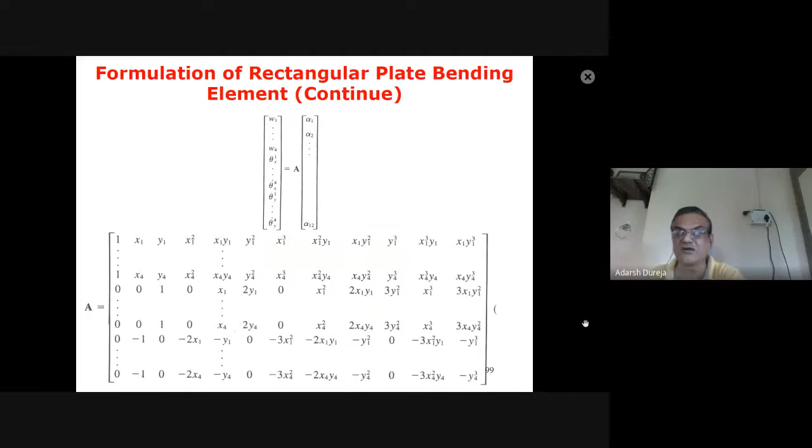And these are the curvature vectors. Now we may ask the question whether this four-noded, 3 degrees of freedom element is conforming or non-conforming. It can also be proved that this is also not conforming.

And if you want to have the conformity of this element, what we have to do is increase the degree of freedom. So what we have to devise is an element which should have an additional degree of freedom, known as d-square w by dx dy.

Till now we were dealing with 3 degrees of freedom, that is dw by dx and dw by dy, and we have to add an additional degree of freedom. As we introduce this, there's additional complexity, additional computation, and some physical representation of twist may not be there in the boundary condition, so it may be difficult to employ such boundary conditions. It's a little more cumbersome.

Theoretically speaking, these are the perfect elements, but non-conforming elements are also in use because of their simplicity. So if you are using this four-noded, 4 degree of freedom element, we'll have a 16 degree of freedom rectangular plate element.

And this kind of polynomial which we have to choose from Pascal's triangle to devise the polynomial w of xy. So this was all about the formulation of thin plate elements which I wanted to discuss.

We have discussed the thin plate element, which is a 3 degree of freedom triangular plate element. Then we discussed the 3 degree of freedom rectangular plate element, and then we devised a solution where, by introducing an additional degree of freedom, we can have a conforming element, which is a 16 degree of freedom rectangular plate element.

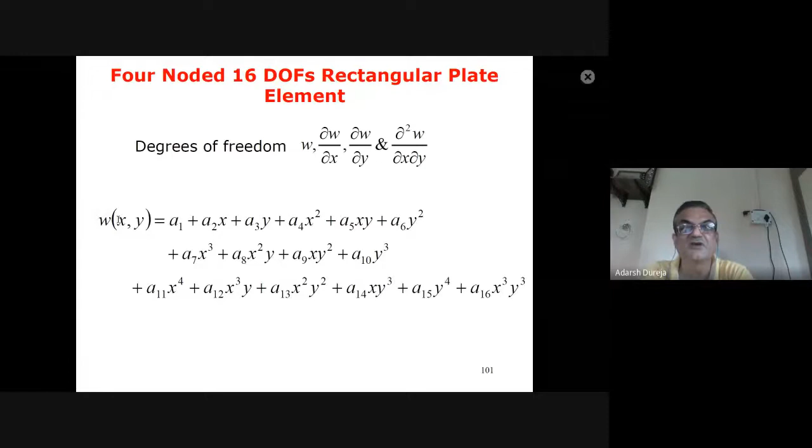Now, just to see what we have studied in this particular portion, how does it work? I have taken a sample problem where we are trying to find out the central deflection and stresses for a simply supported rectangular plate.

So the problem in hand is on the right hand side. What you are seeing is our actual structure, this rectangular plate. The problem definition given here is: determine deflection and stresses at the center of a simply supported rectangular plate subjected to uniformly distributed load, using the following numerical data.

The dimension of this plate is 10 units by 5 units, and the thickness of the plate is 0.2. So the smaller dimension of the plate is 5, divided by the thickness of the plate which is 0.2, so 5 divided by 0.2 comes to be 25.

So 25 means this parameter is more than 10, so it really qualifies for our thin plate analysis. The E value is 10 to the power 6, nu value is 0.3, and Q value, which is the perpendicular load acting on this plate, is 10 units. That is our problem definition.

And what we have to do is find out the stresses and the central deflection. By virtue of the definition of this problem, as all the edges are simply supported and the structure is fully loaded, we can utilize the symmetricity of this problem. What I propose is we can solve only a quarter of the geometry.

So this is the model which we have taken, modeled using only one single element, 1, 2, 3, 4. It has got 4 corner nodes. So the element side - now if you look at the boundary condition, we are saying this element edge 1-2 is a simply supported edge.

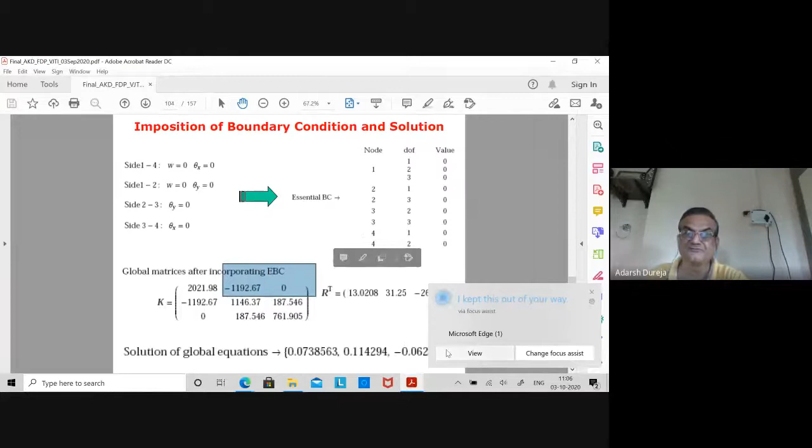Now comes to the boundary condition. Along the axis of side 2-3, side 2-3 and side 3-4 are the symmetric boundary conditions.

Now, if you look at the symmetric boundary condition, as this plate is going to deform in the downward direction, this side edge 2-3 is not going to rotate about the axis of Y. I hope you agree with that. The axis of side 2-3 is not going to rotate about the axis of Y, so the boundary condition we put is theta Y equal to 0.

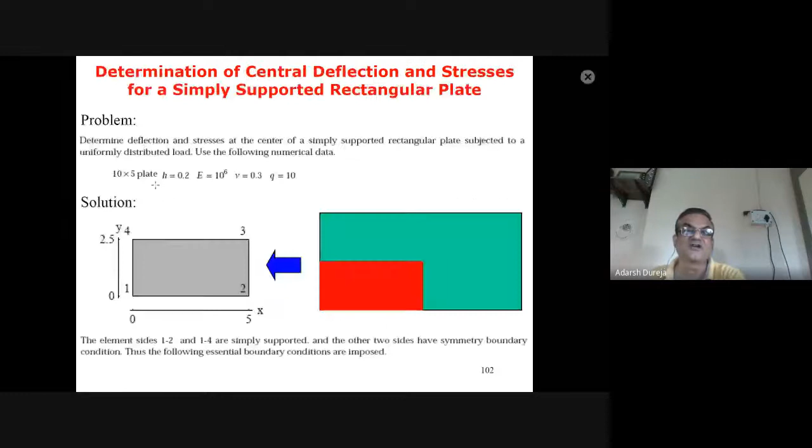Similarly, if you argue for the symmetric boundary condition for edge 3-4, it is not going to rotate about the axis of X. So theta X equal to 0.

So if you translate this boundary condition along the node, because these are edge conditions, we know that node number 1 is common to side 1-4 and 1-2. So we'll find out the boundary condition: W, theta X, and theta Y equal to 0.

We are saying that degree of freedom 1 is W, degree of freedom 2 is theta X, and degree of freedom 3 is theta Y. So for node number 1, all these 3 degrees of freedom 1, 2, 3 are 0. Similarly, for node number 2, which is common in side 1-2 and side 2-3, what we have is W equal to 0, theta Y equal to 0.

So we are saying that for node number 2, degrees of freedom 1 and 3 are 0. Similarly, for node number 3, degrees of freedom 2 and 3 are 0. Similarly, for node number 4, the degrees of freedom W and theta X are 0. So these are the essential boundary conditions which we need to impose.

As we know, when you apply this boundary condition Ku equal to F, what we have to do is knock out those particular rows and columns which correspond to these 0 degrees of freedom. So because for node number 1, degree of freedom 3 is 0, and for node number 2, degree of freedom 1 is 0, we will only have a particular element which is coming into this reduced matrix after imposition of boundary condition, which is fifth from the column and row.

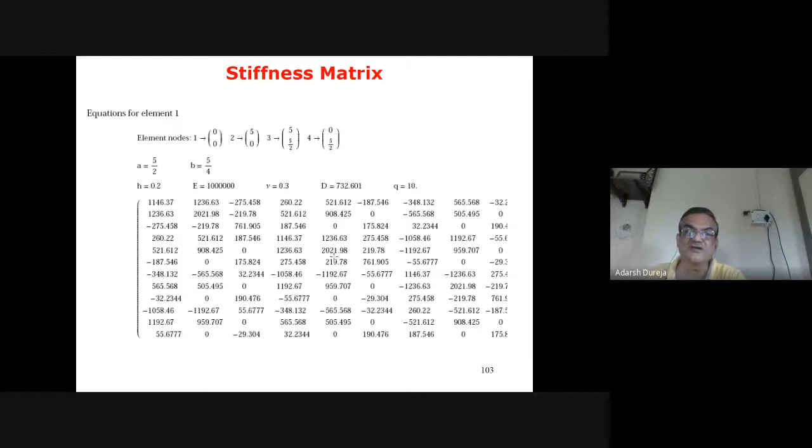So the first element which we get after imposition of boundary condition is 2021.98. Similarly, we can argue for the other elements of this reduced matrix, which we have arrived at after incorporation of the essential boundary condition. Similarly, the right hand side vector is this.

Now we know that after imposition of boundary condition, we can solve for these unknowns. There are only 3 unknowns, because these 9 degrees of freedom are already 0. So we have only 3 unknowns to calculate, and these 3 unknowns we can calculate from this Ku equal to F. So these are the solution of this global equation.

Now, knowing the interpolation functions, these are the various shape functions. If you populate this nodal degree of freedom vector, there are 9 zeros, and these are the 3 values which we have calculated. So if you write down the nodal degree of freedom vector by imposing this solution vector as well, we'll get this 12 cross 1 nodal displacement degree of freedom vector.

These are the curvature values which we can always calculate because we know the W value, so we can find out dou square W by dou x square and things like that. And these are the moment values, and these are the shear force vector. So this is the moment, this is the shear force.

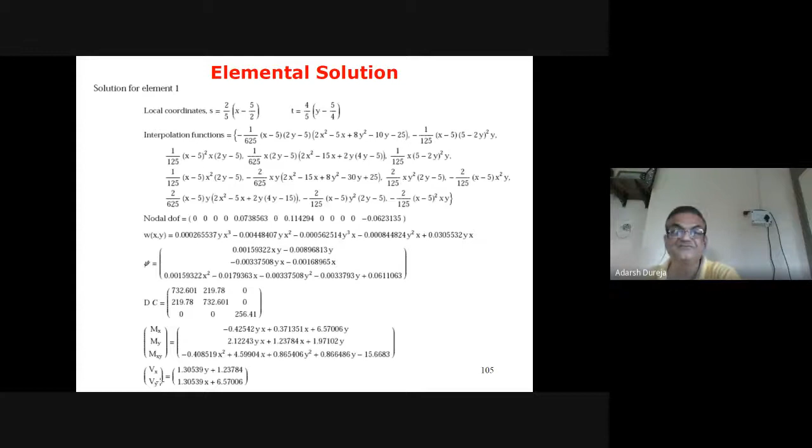Now, having known the moment and shear forces, we can always calculate what will be the variation of sigma x, sigma y, tau xy, and transverse shear stresses. And you can calculate what is the value of these stresses at that particular nodal location. So this is the value which we have calculated.

So the point I wanted to emphasize was, see the value of maximum in-plane stresses, what we are getting. These are the maximum in-plane stresses. What do you mean by maximum in-plane stresses? This is sigma x, this is sigma y, and this is nothing but in-plane shear stress tau xy. And these are shears, meaning transverse shear stresses, which are 21 and 73.

And the maximum in-plane stresses like bending stress sigma x, sigma y, and in-plane shear stress tau xy, we had said it would be of the order of, let's say, that second order thing. So what we are getting is in thousands, order of thousands. So what we had assumed, that the transverse normal stress sigma zz can be neglected as compared to the in-plane stresses and the transverse shear stresses, is true, which is coming out from this analysis.

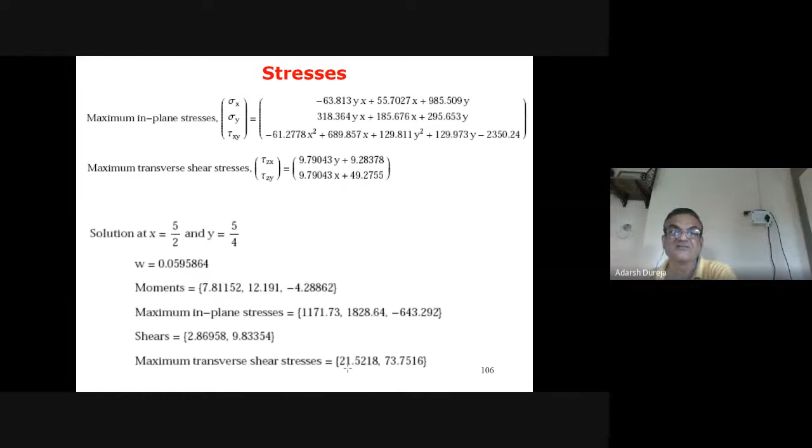And this is the value which you can always obtain by post-processing. You can calculate at each and every nodal location what is the deformation and all that. And because this is a simple problem, we also know what is the exact solution of this kind of problem.

So there is a series solution available for this problem, and it gives you the maximum deflection of 0.086, which is not very close to the numerical solution, which is 0.11. But as you see, we have taken only one element for the solution. So as we take more and more elements, we'll converge to the exact solution, right?

The point I want to emphasize here is the deformation we are getting is more than the closed form solution, which is contrary to the definition of finite element method, which says the stiffness of finite elements is always more than the stiffness of the actual structure. That is why we always get a deformation solution which is less than the closed form solution. But what we are getting here is more than the closed form solution. This is happening because we are using a non-conforming element.

But I can assure you that although because of only one element you are getting 0.114, which is not very close to 0.086. But if you take some 4 elements or 8 elements, you reach very close to the closed form solution. The only difference for a non-conforming element is the convergence will be from the higher value, and it will come down to the converged value, the closed form solution.

While for all other conforming elements, our bar element, beam element, and 3D element, the convergence will always be from the bottom side. But for non-conforming elements, convergence will be from the top side.

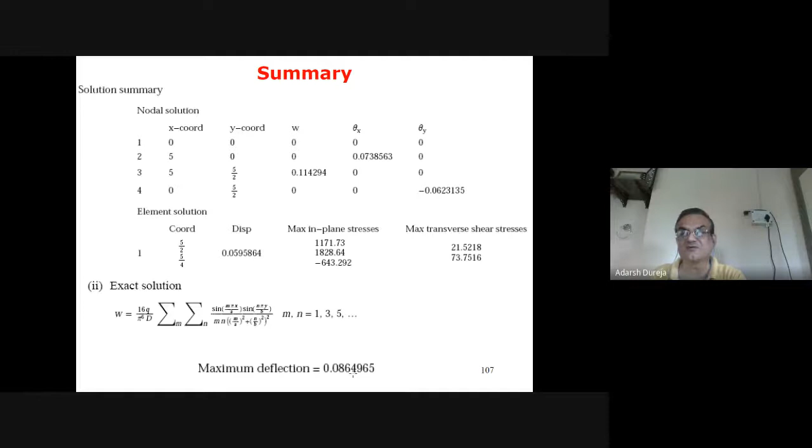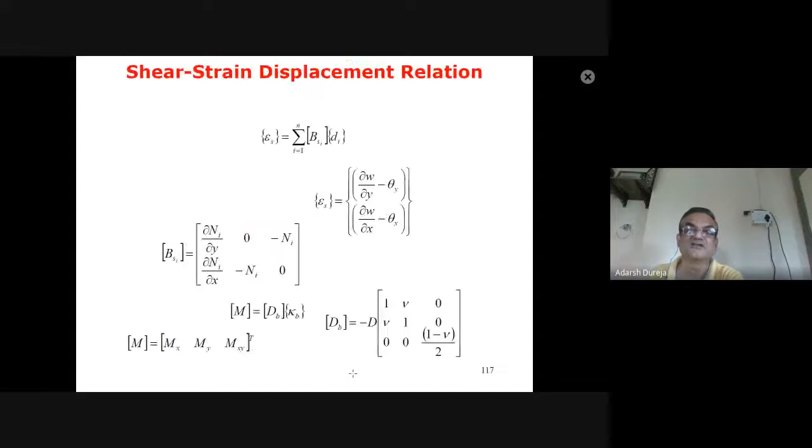So this is what I wanted to talk about for thin plates. The time is less. Otherwise, I wanted to cover 3D thick elements, thick plate elements, and then talk about shear locking and all that, Mindlin plate element, and then non-linear analysis. I had planned it a lot, but I don't think time is permitting me to do that. It's already 11:13, so we will talk about it maybe some other opportunity arises.

So just a few more slides which I wanted to definitely say about it. There are some golden rules in finite element method: elements must be connected at nodes. That is for sure, whatever we are meshing, they must be connected at nodes. Otherwise, the side adjacent mesh may not know there is a mesh on the side of that. So it must be connected.

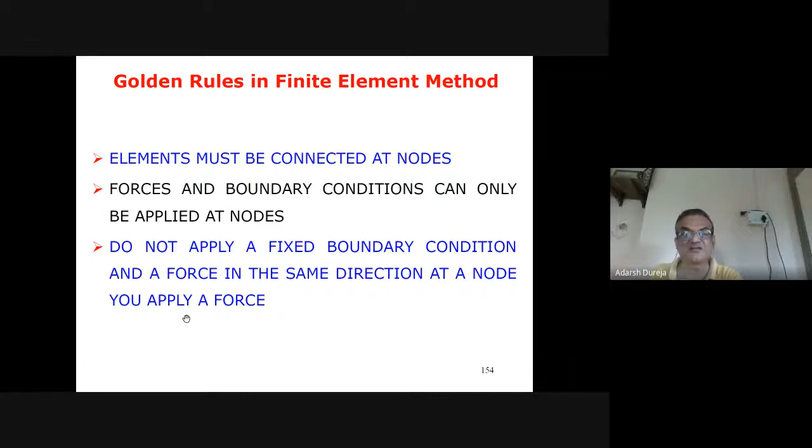Forces and boundary conditions can only be applied at nodes, and do not apply a fixed boundary condition and a force in the same direction at a node. So the fixed boundary condition and force, if you are applying in the same direction, it doesn't carry any meaning actually.

Then finite element model versus structure. Finite element model of any structure is not the structure. So what we assume, that whatever we have modeled is actually representing the structure, is not true. It depends on how much detail we have modeled, like how accurate our geometry is, how accurate our material model is, how accurate our boundary conditions are, and things like that. So whatever we are predicting from finite element may not exactly match the experimental deformation.

So we should know what are the limitations of the finite element model. The details of the finite element model strongly affect the accuracy of the predicted displacement and stresses within the structure. So whatever detail we have put in the model, it affects the accuracy of the result.

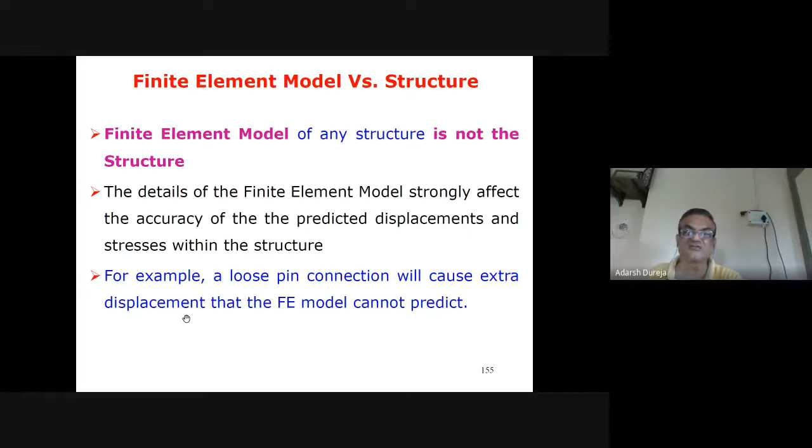Then, for example, suppose if you are modeling a structure connected to another structure through a loose pin, because for assembly we will need some kind of tolerance. So if you are having a loose pin for movement's sake or whatever, and in the finite element model you are assuming zero clearance, that there is no displacement allowed between these two, then the deformation will never match the finite element prediction, because in the finite element model we have not modeled that clearance. So that kind of error will always be there. We need to take care of that.

Then for any engineering analysis software, we must understand whatever software package we are using, what are the assumptions, and which element can do what all. Then examine and critique every result with simple checks. We should always do simple checks and balances to know whether the result is meaningful or not, because any finite element package we are using will give some result. So whether the results are accurate or not, we have to ensure. Examine the results.

Do they make some sense? Make a mechanics of materials check calculation to ensure that the results are within the right order of magnitude, and reconfirm the finite element model represents the physical system - like geometry, material properties, boundary conditions, applied loads, whether everything has gone into the model or not. Then only we can ensure that whatever the model is predicting will be matching close to the experimental result. Although experiments will have many more variation parameters, at least we can assume that the results will be close to the experimental results, right?

So I closely follow the book of R.D. Cook. At one point of this description, he has written: finite element method makes a good engineer better and a bad engineer dangerous.

So I agree with him that if you are using finite element method for doing any structural analysis or whatever, and if you are not understanding the underlying assumptions, and not applying it properly, then sometimes it could be dangerous also. So it is our duty as engineers to check whatever finite element results we are getting - that it is making some sense, and whatever we have modeled is as per the result expected or experimental trials and all that, right?

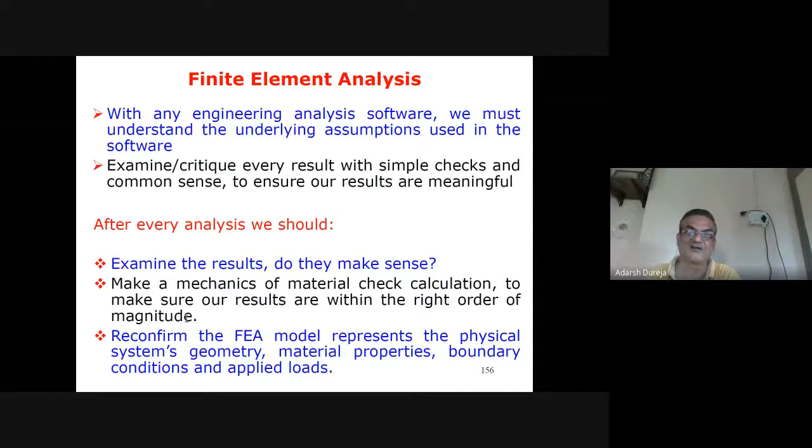So with this, I thank you all, and if there are any questions, I am happy to answer them.